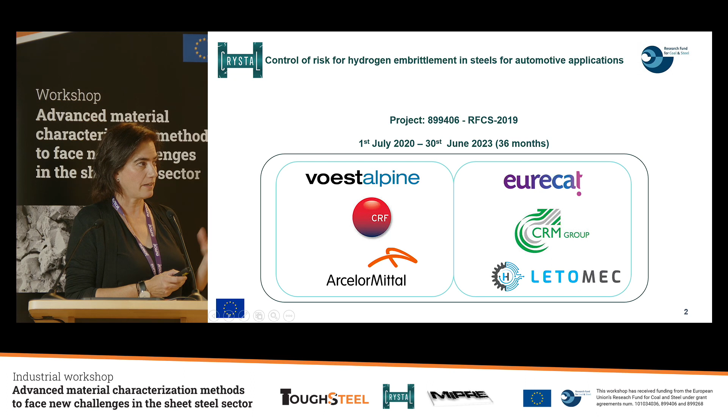The consortium is composed of 6 different partners. 3 of them are industrial partners: 2 steel makers, voestalpine and ArcelorMittal, and 1 car part manufacturer, CRF. And 3 research entities: CRM, Letomec, a spin-off of the Pisa University, and Eurecat. In this project, Eurecat is the coordinator.

An interesting news was published at the beginning of this month in a business and financial magazine called Market Watch. This article says that the advanced high-strength steels in automotive market is projected to experience growth in the forecast period of 2023 to 2030, as shown by new trends analysis and competition tracking, with a compound annual growth rate of 13.6%. Why is it important to use advanced high-strength steels?

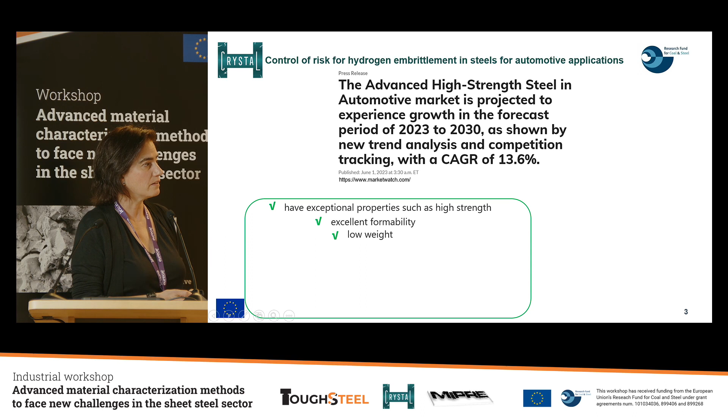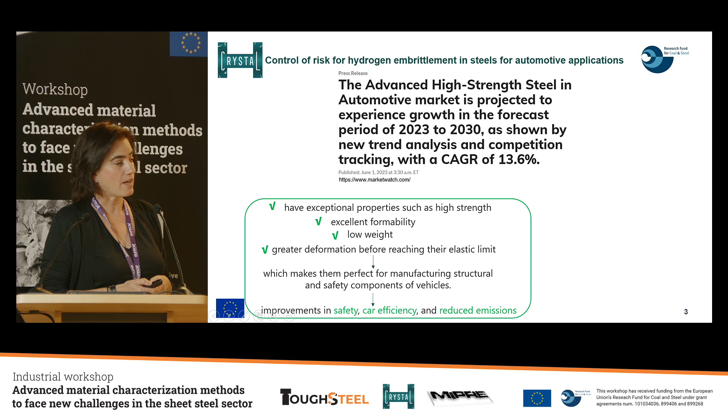Because we all know they have exceptional properties such as high strength, excellent formability, low weight, greater deformation before reaching the elastic limit. All these properties make them perfect for manufacturing structural and safety components of vehicles, improving safety, car efficiency, and reducing emissions.

But they are not all advantages. They show some challenges for manufacturing them, for example tool wear or spring back. They show crack sensitivity, especially at the edges, and show hydrogen embrittlement susceptibility. So the Crystal project is focused on the study of hydrogen embrittlement of advanced high-strength steels for automotive applications.

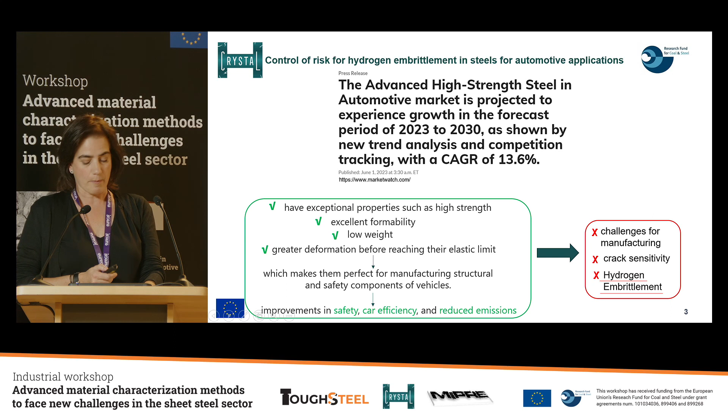Here are the main objectives of this Crystal project. We have 6 different objectives. First, validate the hydrogen embrittlement risk in advanced high-strength steel parts for the automotive industry.

Study the effect of hydrogen content on advanced high-strength steels in 2 types of these steels: cold-rolled steels and press hardening steels. Determine the hydrogen threshold content that drastically reduces the mechanical properties.

Use a novel non-destructive methodology, in this case a solid-state gas sensor, to quantitatively measure in situ the hydrogen absorbed during real production of steel parts.

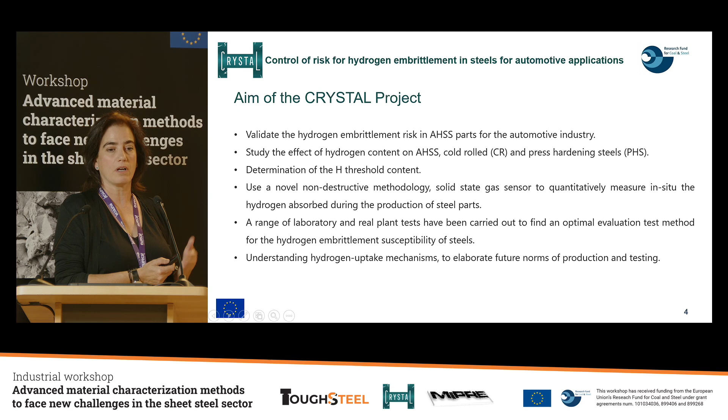The 5th objective is to perform a range of laboratory tests and also real plant tests to optimize or find which is the best method to determine the hydrogen embrittlement susceptibility of this type of steel. Finally, the last objective is to increase the knowledge or understanding of the hydrogen embrittlement uptake mechanisms to elaborate future norms for production and testing.

Atomic hydrogen absorption in automotive components can take place at different stages of car part manufacturing and also in service life. For example, in car part manufacturing, the most critical points are during steel production, during forming - it means cutting, joining, forming also - and then in pre-treatment, which includes e-coating, etching, and all these steps.

The hydrogen that can be absorbed during car part manufacturing is called internal hydrogen. Then the hydrogen that is generated during the oxidation and corrosion reactions during service life, and can be absorbed in the microstructure, is called external hydrogen.

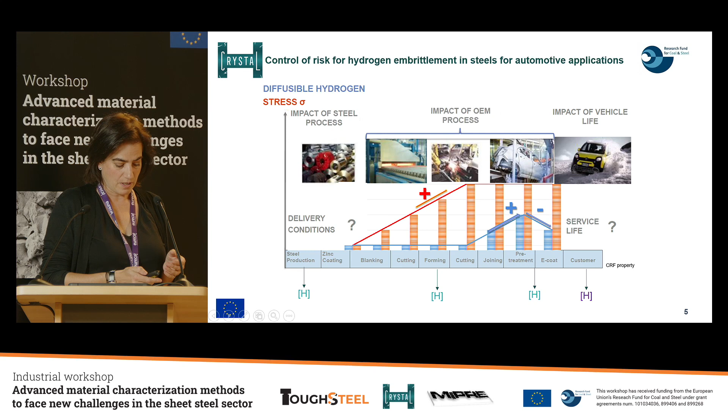So we think it's very important to know the effect of the internal hydrogen and the external hydrogen on the mechanical properties of these advanced high-strength steels. So the Crystal project focuses on these 2 types of hydrogen: internal and external hydrogen.

Here is the general project overview of the Crystal project. Later on, we will discuss in more detail each of the work packages. The work package leader is detailed in each yellow star. So we have 7 work packages. The first one is the coordination.

Then we have work package 2, where we selected the advanced high-strength steels that we wanted to study in the Crystal project; the leader is ArcelorMittal. In work package 3, we optimized the charging methodology to charge these cold roll steels and press hardened steels; the leader was CRM. In work package 4, we performed all the laboratory tests to study the internal and external hydrogen effect; Eurecat was the leader.

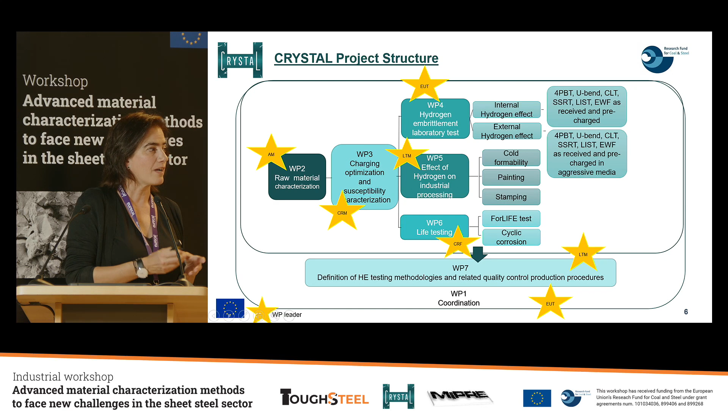In work package 5, we studied the effect of hydrogen in a real industrial plant; Letomec was the leader. In work package 6, the leader was CRF, studying life testing and performing different corrosion tests. Finally, all the results are summarized in work package 7, where we have to define the best methodology and the best test to identify and quantify the susceptibility of hydrogen embrittlement of these advanced high-strength steels.

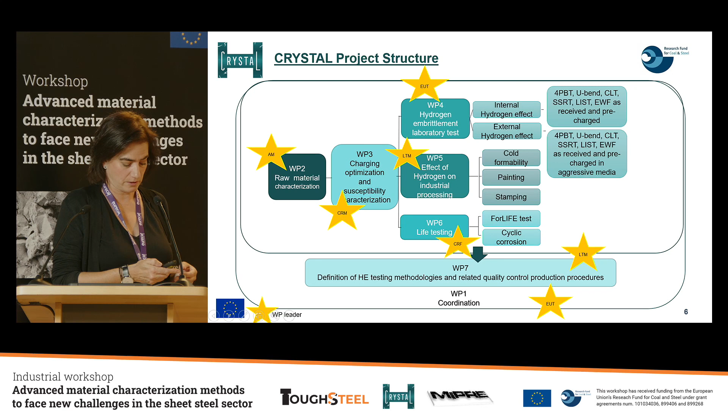So if we move in more detail to all the work packages, we start with work package 2. We selected 4 steels: 2 cold-rolled steels, CP1200 electrogalvanized from voestalpine and MS1500 also electrogalvanized from ArcelorMittal, and the press-hardened steels were PHS1500 galvanized from voestalpine and Usibor 2000 with aluminum silicon coating from ArcelorMittal.

We performed the same general characterization in terms of mechanical properties, also evaluating the microstructure, and we determined the hydrogen content in this steel process. We used 2 different techniques, LECO DH603 from voestalpine and a TDA equipment from ArcelorMittal. The hydrogen content measured was from 0.07 to 0.11, so the hydrogen pickup during the steelmaking process is very low.

Doing this hydrogen content characterization, we realized that inside the consortium we have 5 different laboratories with facilities to measure the hydrogen content. So we thought it was very important to define if the hydrogen content measured in all the labs were more or less similar, or which was the scatter that we have in this value.

In the table on the right, you can see all the techniques or the methodology that we have in our consortium. We can see that we have hot extraction, we have micro GC, hot extraction with different gases. Also, we have different heating rates, different maximum temperature, and different holding time.

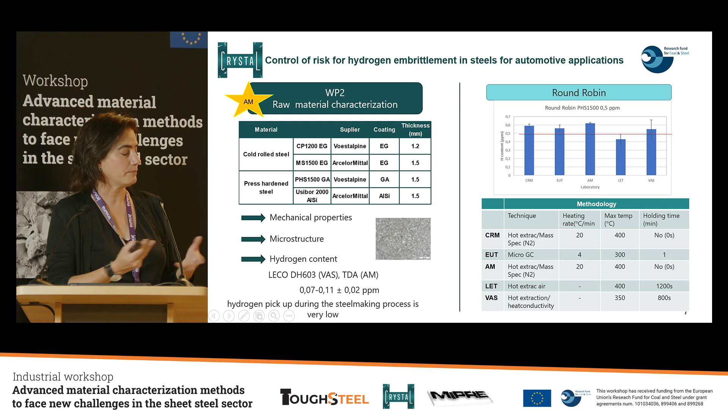So here is work package 3, where we optimize the charging methodology for these 2 types of steels. In the case of cold roll steels, we electrocharge using a mixture of sodium chloride and ammonium thiocyanate. We have to remove the zinc coat again, then hydrogen charge, and then apply a zinc coat again to keep the hydrogen in the steel, in the microstructure.

So we have to optimize these 3 methodologies: how to remove the zinc, how to charge the samples or the cold roll steels, and then to zinc coat again to obtain a tiny and dense zinc coating.

And in the case of the PHS steels, we hot charge this type of steel, modifying the dew point, the atmosphere, the holding time, and the temperature. Later on, Mélodie Mandy will explain how the optimization of these charging methodologies works.

Our hydrogen content target was between 0.5 to 1 ppm. We know that this value is far from reality, but we had to fix at least 2 hydrogen contents to perform the test in work package 4. In this work package, we also characterize in terms of diffusivity, electrochemical permeation, and solubility.

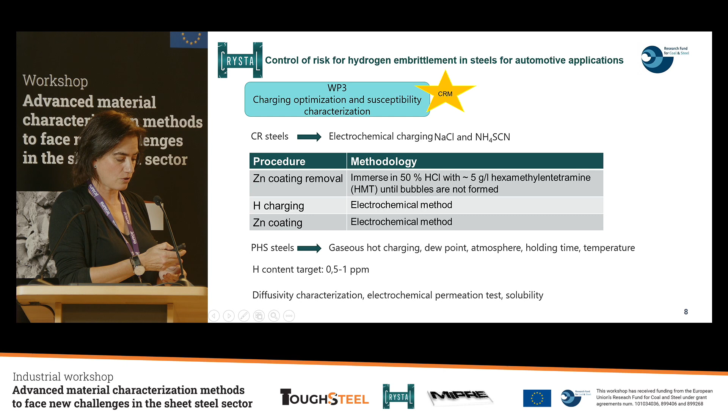Here is work package 4, where we perform all the laboratory tests. As I said before, we divided this work package into big tasks to measure the internal hydrogen effect and the external hydrogen effect. We had several meetings at the beginning of the project to decide which was the best sample geometry to perform all the tests.

In this case, we selected a plain sample to perform the U-bend and the 4-point bending test, and a SEP1970 for all the tests, except the cracking resistance.

We also had several meetings to define how the samples had to be prepared. In the case of the PHS steels, the PHS manufacturers send the blanks before charging, so they send to CRM the blanks, CRM charged the samples and then sent to the partners. Each partner was responsible for laser cutting the edges and laser cutting the holes in this case.

We have to include also that for the PHS steel 1500, we had to remove the zinc, charge the samples, and apply the zinc again.

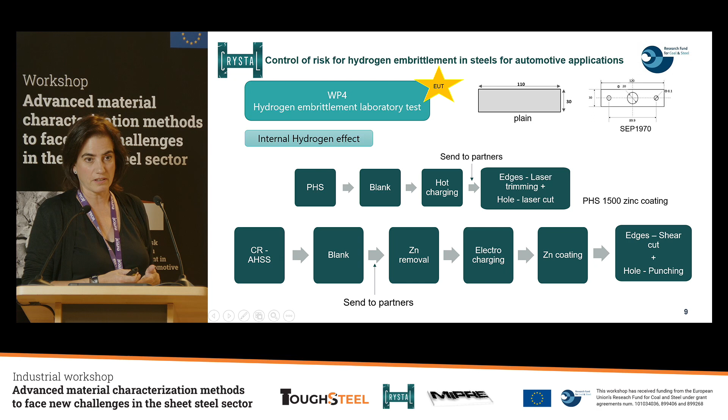And in the case of cold rolled steels, the steel manufacturers sent the blank to all the partners, and each partner was responsible for charging the samples. So as I said before, removing the zinc firstly, then electrocharging, applying the zinc coating again, and then we agreed to shear cut the edges and punch the hole.

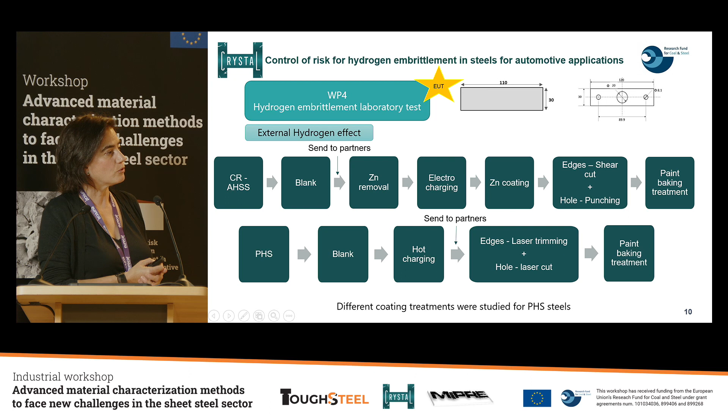In the case of external hydrogen, the samples were the same and the sample preparations were also the same, but we added a last step, which is paint baking treatment to be closer to reality. Also, we have to say that in the case of the PHS steel, we realized that it was very difficult to introduce hydrogen to the materials, so we decided to study how was the effect of hydrogen if we have different coating treatments, in the case of Usibor and PHS steel.

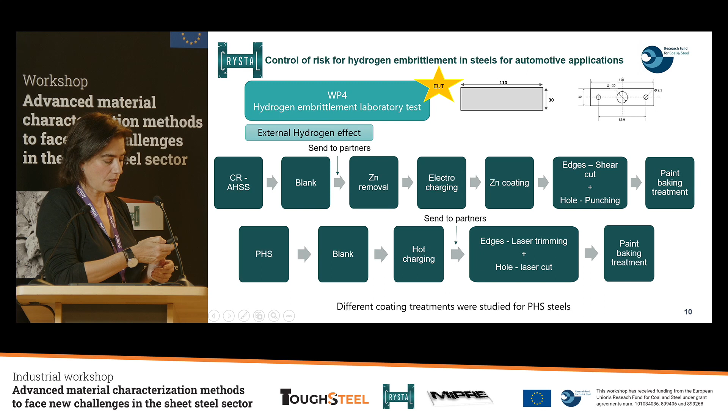So here are all the tests that we perform in this work package. In the case of studying internal hydrogen, we perform 4-point bending test, U-bend, constant load test, slow strain rate test, and cracking resistance in the as-received condition and after pre-charging. In the case of external hydrogen, we perform 4-point bending test, U-bend, constant load test, a slow strain rate test,

step load test, also in as-received condition, after pre-charging, and in aggressive media. We decided to test these samples in immersion and in salt spray test. Anis Aouafi, later on, will explain the most important results of this work package, of this test. And on the right side, you can see some images of the test.

So on the top right, you have the cracking resistant tool that Laura mentioned sometimes today. On the top left, we have a 4-point bending device. On the bottom right, a 4-point bending test in immersion. And on the bottom left, a slow strain rate test.

Also, I would like to add that in all the cases, we measured the hydrogen content before the test and after the test. Because in some cases, for example, in the constant load test, the duration of the test is quite long, so we wanted to be sure that we don't have hydrogen uptake during the test, I mean, the gaseous hydrogen during the test.

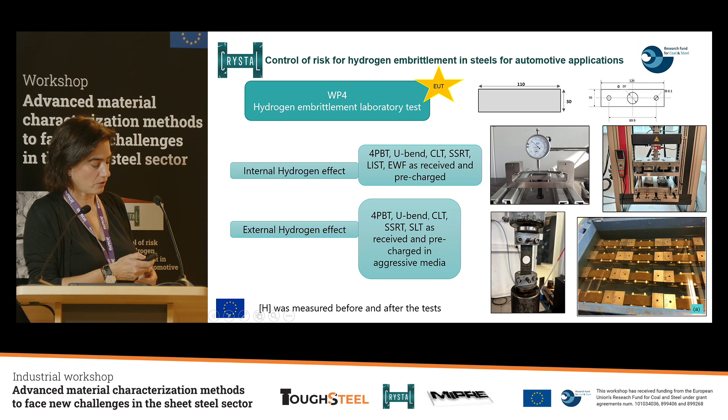So in work package 5, we study the effect of hydrogen, but in real industrial processing. We evaluate the cold formability, performing the hole expansion test at different hydrogen content. Also, we evaluate the effect of painting in different conditions, and we perform a 4-point bending test of different types of painted samples, on basic E-coated samples, E-coated plus stone chipping samples, and E-coated plus scratch samples with

2 different stresses. These samples, we evaluate the hydrogen susceptibility, introducing them in immersion and also in salt spray test. And finally, Letomec measured the hydrogen content in different stamping conditions. At the end of this session, Linda Bacchi will show you some results of this hydrogen measurement in

modifying the stamping conditions. And in work package 6, we performed the life testing. Here it was planned to do the ForLIFE tests, but due to economical reasons, CRF couldn't perform it. And we decided to increase the number of the samples tested in cyclic corrosion and increasing the number of inspections.

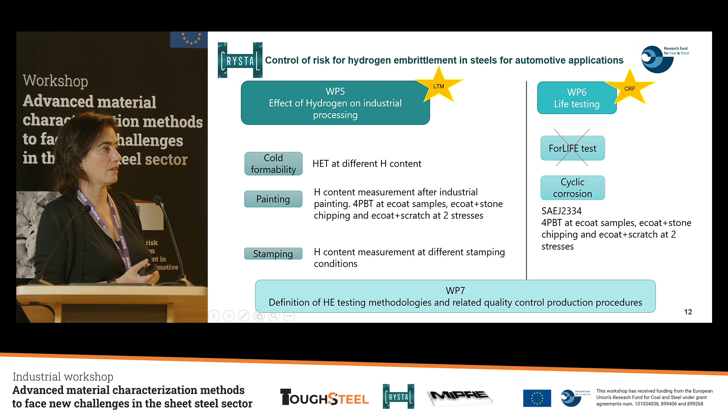So the selected cyclic corrosion test was SAE J2334, and we tested the same samples as in the painting in work package 5. So the samples E-coated plus stone chipping, and E-coated with scratch with different 2 stresses.

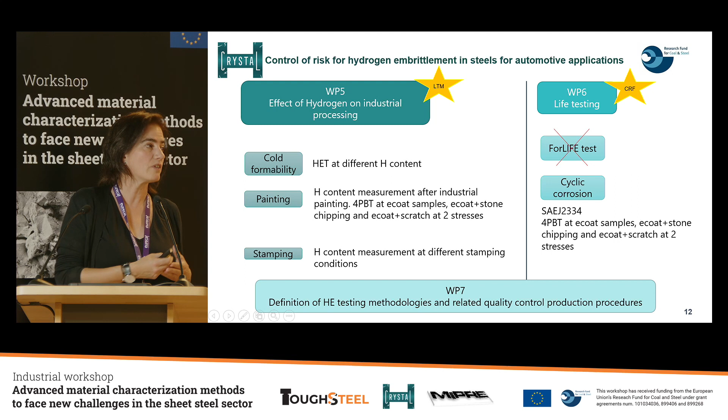And in work package 7, we are analyzing all these results, and these days we are writing a guideline for the car part manufacturer and also for the steel manufacturer, to select which is the best methodology to charge the samples and the best methodology to test the hydrogen embrittlement of these types of advanced high-strength steels.

So as Sílvia told, I come from CRM Group. Firstly, just two words about CRM. CRM stands for Center of Research in Metallurgy. We are a research center located in Belgium, founded 75 years ago. We are among 270 researchers dealing with different aspects of metallurgy. Our global approach is really dedicated to considering the product, the process, and the application. We generally work from the lab scale until the different pilot lines that we have for industrialization. We work for a certain number of members that are usual clients and also for other private clients.

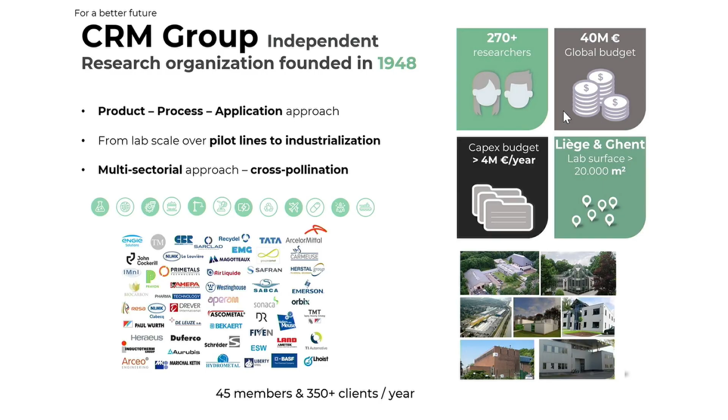Our activities are focused around 6 different axes. The first one is really our core business and is dedicated to process, product, and application development. We also work on the energy shift, on advanced manufacturing, industry 4.0 and digitalization, as well as the circular economy and construction.

So this presentation, as Sílvia introduced it, will be focused on the third work package of the Crystal project. The main objective of this work package was to optimize the charging condition of hydrogen in the 4 different materials that we have tested in the Crystal project. The partners involved were Letomec, ArcelorMittal and the CRM Group.

For Letomec and ArcelorMittal, you will see also Linda and Anis just after this presentation. Globally, the objective of this work package was firstly to optimize the hydrogen charging protocol. As Sílvia told it, it was different for cold rolled steel than for press hardened steels. We also studied the effect of different parameters of this hydrogen charging on the diffusible hydrogen content. Afterwards, the other objective was to characterize the global system in terms of hydrogen behavior in those different metals, so hydrogen traps on one side and hydrogen solubility and permeability on the other side. I will come back on those different aspects.

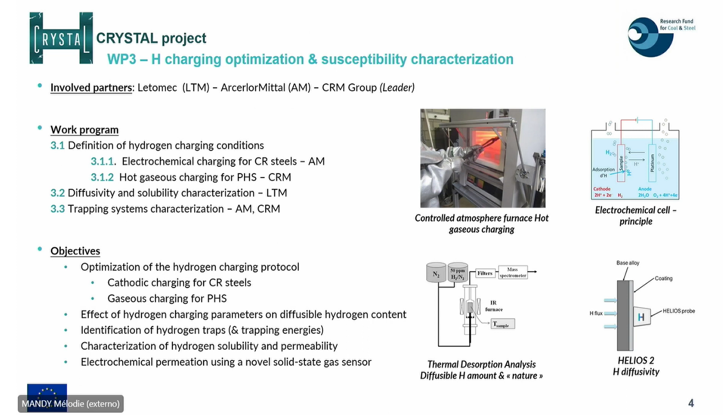So let's begin with the hydrogen charging of the cold rolled steels. Here we come back to the slide showing the general strategy that Sílvia has shown you very briefly during her presentation.

In this case, for the cold rolled steel, we have performed electrochemical charging. This was decided to be representative of what is done or what can appear in the industrial reality. In the case of cold rolled steels, when we received them, we were first forced to remove the zinc coating, as those materials were electrogalvanized, and then perform the electrochemical charging. This was performed mainly at ArcelorMittal for 2 different grades, the MS1500 and the CP1200. For the zinc removal, it was a quite basic method with pickling in HCl and HMTA solution, and after that the electrochemical charging was performed.

So basically, electrochemical charging consists in putting your sample that you want to charge in hydrogen as a cathode in an electrochemical cell, and you will generate hydrogen at its surface. Part of it will recombine into H2 molecules and degas, and part of the hydrogen will enter the material. In this case, we have worked with water and a sodium chloride solution in which we have added various amounts of ammonium thiocyanate, which is actually a recombination poison. This means that this molecule will inhibit the recombination of hydrogen atoms into H2 molecules, and so limit the degassing into gas molecules and favor the entrance of hydrogen in the material.

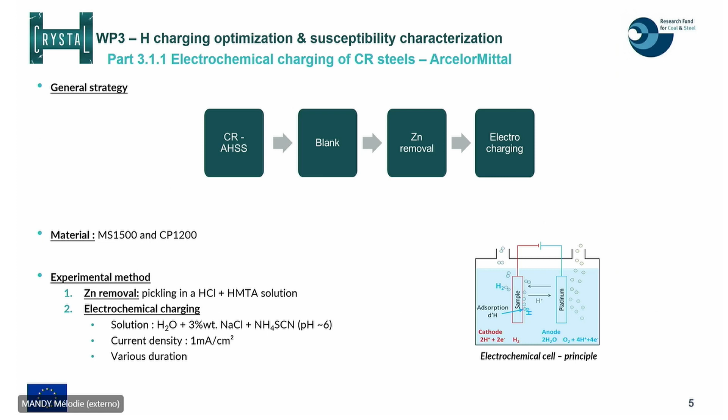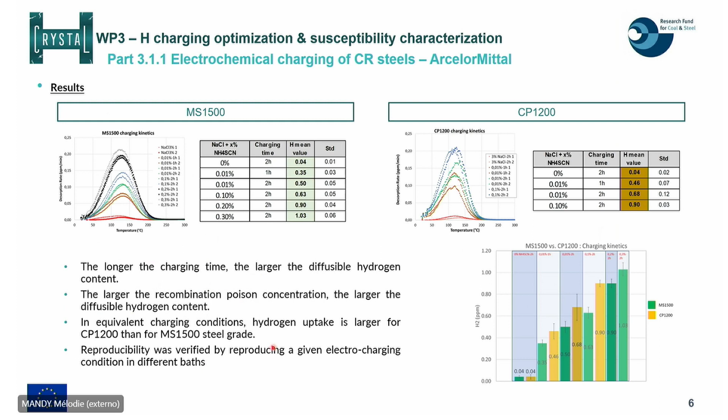When we compare both steels, you have the graph on the right side here, where you can see that in equivalent conditions, the hydrogen uptake will always be a bit larger for the CP1200 than for the MS1500. Finally, ArcelorMittal verified also the reproducibility of those electrochemical charging by reproducing the different treatment in different baths several times. So that was for the part about the electrochemical charging.

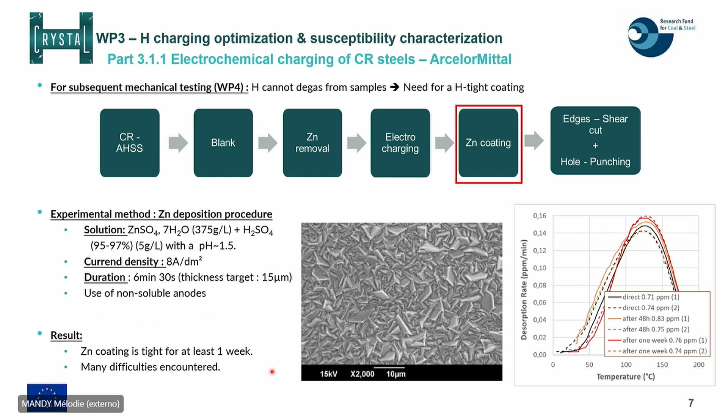So now for the press hardened steel, we are on the other topic. For that part, the strategy followed was to charge them with what we call hot charging, so it's actually a gaseous charging in a furnace. This was performed for both press hardened steels, Usibor 2000 and PHS 1500.

It has to be mentioned that Usibor 2000 is a material coated with an aluminum and silicon coating, while PHS 1500 was actually with a zinc coating. It was actually a GA, so a galvannealed coating.

For the gaseous charging, we performed with steel sheets, already steel sheets, so 160 millimeters by 200 millimeters. The gaseous charging consisted actually of an austenitization heat treatment performed in a controlled atmosphere furnace.

According to specific conditions that we chose in order to fit with the process windows of both steels, you see finally the conditions chosen here in the table. On the right side, globally the austenitization temperature was 900 degrees, or just below or just above.

We have defined several holding times as soon as we reached a temperature of 870 degrees Celsius, and we tested also two other parameters of the atmosphere.

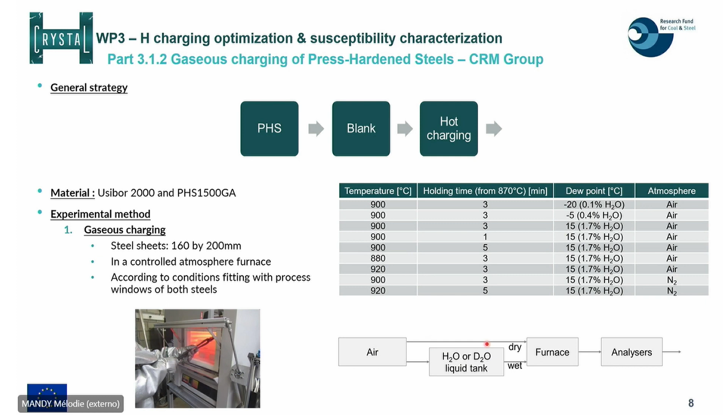After gaseous charging, we perform the thermal desorption analysis. So what does thermal desorption analysis consist of? We put the sample in a furnace.

We heat the sample at a given rate, here 20 degrees Celsius per minute until a temperature of 400 degrees. By doing this, we let the hydrogen that was absorbed in the material desorb, and it is carried away by nitrogen, which is inert here, as carrier gas, until the mass spectrometer to be quantified. Here you see just a small picture of the equipment.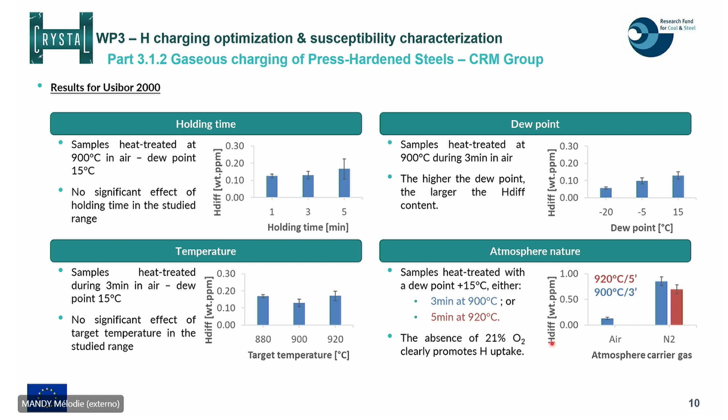So that was for Usibor 2000. The same work was performed for PHS 1500. It was a bit different in this case because we encountered many difficulties charging these materials with the zinc coating. So for the sake of this project, we were forced to charge this material by removing firstly its coating. So the result you see here is not about PHS 1500 GA, but bare PHS 1500.

What we have seen just before for Usibor 2000, the conclusions are quite the same for these bare materials. We have a strong impact of the atmosphere - in nitrogen atmosphere, we have a larger uptake than in air. We also have this effect of the dew point, which is well marked. The effect of the holding time and temperature are maybe a bit less marked, a bit less significant than for Usibor 2000, but remains less important than the atmosphere effect.

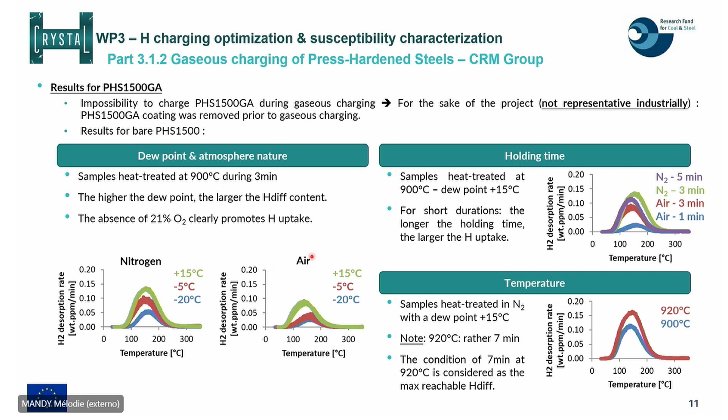So that was for the hydrogen charging. Now in terms of characterization of the system, at Letomec they were able to characterize the diffusivity and solubility of the four materials we worked with in the crystal project, owing to a specific tool that they developed, called the Helios 2 probe. It's based on the principle of an electrochemical permeation cell, but with a solid state sensor.

The different conditions used are given here. I will not enter into the details, but the principle is highlighted here: you put hydrogen on one side of the material, you detect which amount and in which time it will arrive to the other side, and you have a graph like this one with the hydrogen flux as a function of time. The diffusion coefficient, D in the equation, is defined based on a method they chose from the literature, as a function of the time required to reach a certain level of the regime flux of hydrogen diffusion through the steel.

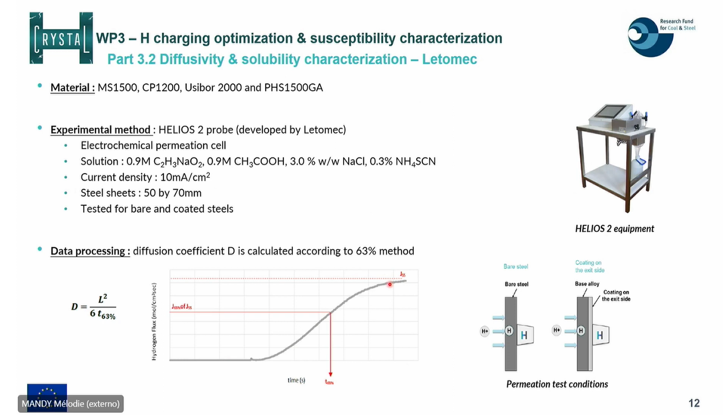Some words about the results - typically results you can obtain here, for instance, for the MS1500. They performed these tests on the bare steel and also on the zinc-coated material, or the AlSi-coated material for the Usibor 2000. In each case, the coating was only on one side of the material, just to see its effect. And you see a bit the typical experimental curve that you can obtain.

In terms of results, what we see mainly is the diffusion coefficient of hydrogen, summarized here in the table. You see that mainly what we could expect is the fact that the presence of the coating generally hinders hydrogen diffusion, so diffusion coefficients are smaller. Diffusivity in bare cold-rolled steel is quite similar in both of them. And for the PHS steels, Usibor 2000 apparently shows a slightly slower hydrogen diffusivity than PHS 1500.

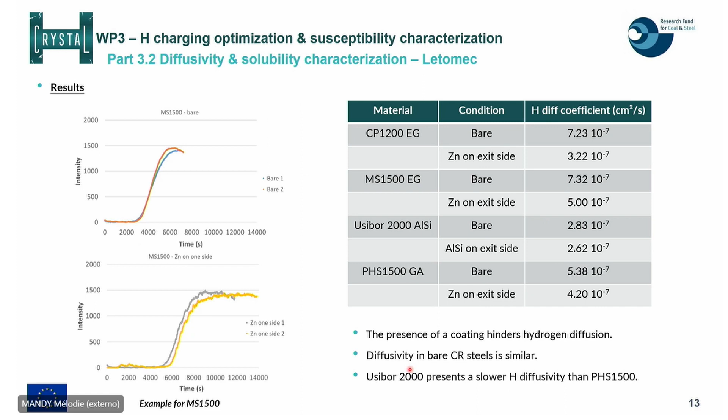So this leads me to the final part of this presentation. A last thing we had to do in this part was to characterize those materials in terms of hydrogen traps. What was performed here is globally the same methodology as just before - firstly, we charged the samples with hydrogen, using electrochemical charging for cold-rolled steels and gaseous charging for PHS.

The specificity here is the fact that we used deuterium for this study at ArcelorMittal and at CRM. Deuterium is the hydrogen isotope with one more neutron. It's very interesting because it's far more scarce than hydrogen, so we are sure we can perfectly identify it when we find it in the results. This was also performed on bare steels in both cases, not only for PHS 1500, because the presence of a coating would induce a diffusion step that would be slower and would impact the results. After that, we performed thermal desorption analysis with various heating rates, and we applied the Kissinger methodology.

So basically, the idea is that when you have a graph like this for one given material with different heating rates, you have a peak temperature which is different at each heating rate. You use this temperature in this equation, and you find the activation energy that we found here for the material. As you can see, we have activation energies for detrapping of hydrogen which are quite close, and we are convinced that it corresponds to reversible traps that are likely dislocations for those materials.

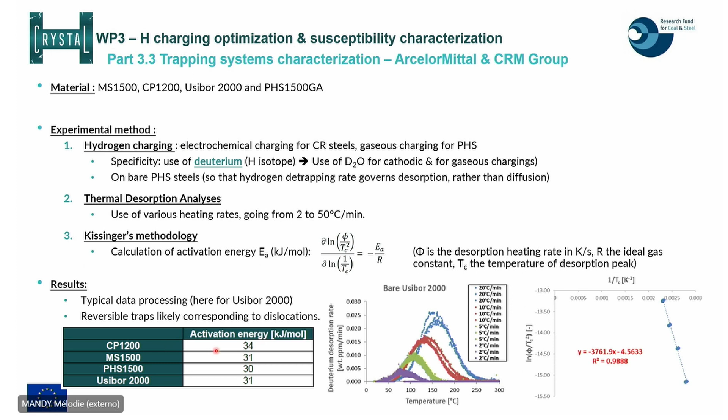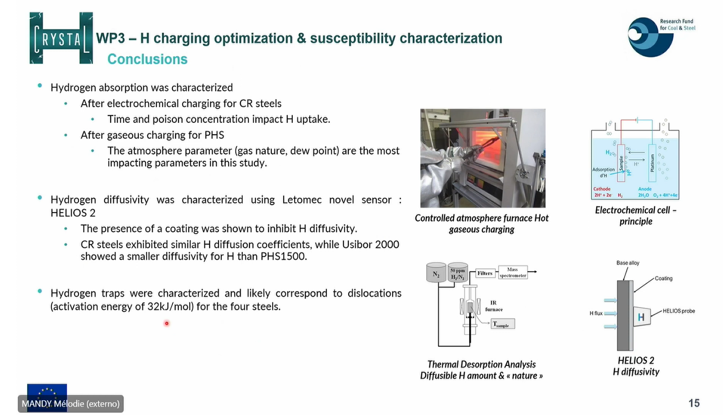For the conclusion, we have charged hydrogen in the 4 different materials with more or less difficulty depending on the material. We see some impact of specific parameters, like the time and the poison concentration for the cold-rolled steels, and like the atmosphere for the press-hardened steels. We were also able to test diffusivity and permeability of hydrogen through those materials with and without the coating, through the Letomec sensor Helios 2, and we were able to characterize the different traps present in the material as dislocations. Thank you very much for your attention.

Hello everybody. Today I'm in charge of presenting the results that have been obtained for mechanical characterization of hydrogen embrittlement during this project. Let me first give a brief summary of all the tests that have been tested.

I think Sílvia mentioned them in the introduction. The two first tests have bending solicitation, the famous well-known 4-point bending test. I will go into detail for this test later.

The U-bend test, which is used to simulate the forming process. As you can see here, I take my pointer. As you can see here, we simulate the bend, and then we use the screw in order to keep the sample under deformation.

The other tests used are the constant load tests, and the principle of this test is to impose a constant displacement using this kind of device, called the proof ring device, which acts as a spring to maintain the sample under constant displacement.

The two other tests are the slow strain rate test, or the linearly increasing stress test, which uses a tensile machine to apply a constant increase of loading at various strain rates.

The other test that has been used is the incremental step load test, and for this one we also use the tensile machine in order to apply an incremental step loading during the test.

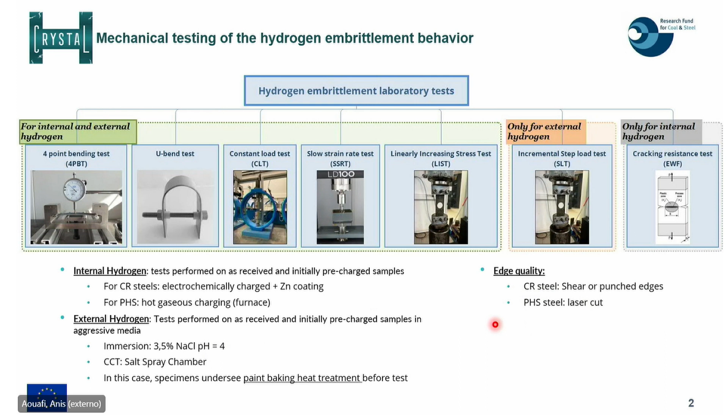Let me begin with how we characterize the internal hydrogen using the 4-point bending test. The principle is to impose a constant displacement using a screw, and we measure the displacement using this comparator. This displacement is correlated, in the elastic domain, to the applied stress using the setup geometrical parameters and material properties like thickness.

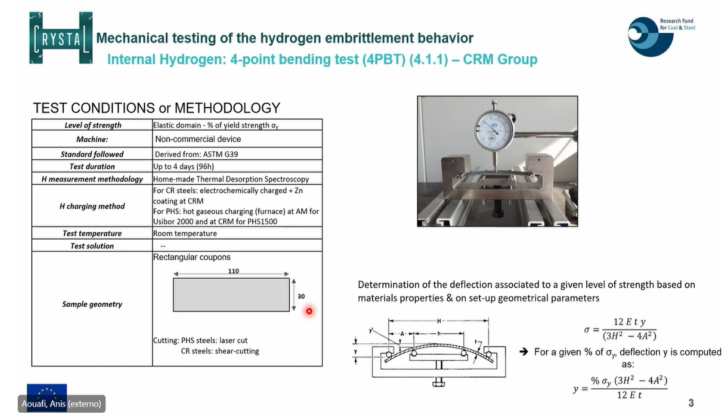This test has been applied during 4 days on press hardening steel and cold rolled steel with different internal hydrogen content. The results are summed up in this slide.

For press hardening steel, where the specimens are laser cut, we could obtain for all materials a delayed fracture map with applied stress versus diffusible hydrogen, and when the crack occurs, it's highlighted by a red point. With this graph, we highlight the delayed fracture map that we could obtain using this test under these conditions.

On the right is highlighted the obtained delayed fracture map for MS 1500, and in this case the edge was sheared. So we could not compare the behavior of MS 1500 regarding PHS 1500, because different types of cutting have been used for both materials.

Another remark, as mentioned by Mélodie before, we were not able to have enough hydrogen charging on the CP1200. We are still working on it. We were surprised by that, and we were not able to obtain an equivalent delayed fracture map compared to the other materials.

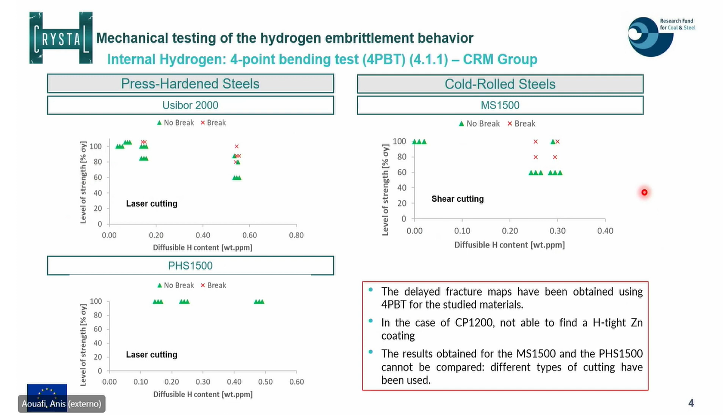The second result I want to show you, we have chosen to present today, makes the bridge with what was presented this morning, applying the essential work of fracture methodology to the hydrogen embrittlement topic. The principle of the test - I think the details were mentioned this morning.

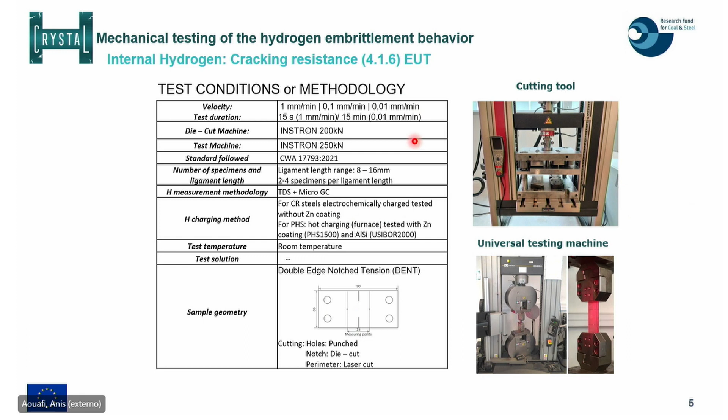The specimen is a double notch specimen, and it has been used on specimens that have been electrochemically charged for cold rolled steel, or hot charged for press hardened steel, with different strain rates or velocities used for this test.

So the results that have been obtained - here I will focus only on the case of CP1200. The principle of the test was detailed this morning. What's shown here on the left, on top, is the total work of fracture that was obtained with different hydrogen contents.

As you can see here, for different ligaments, we can highlight that using this kind of test, the essential work of fracture, we can discriminate the effect of hydrogen and the effect of different hydrogen content using the parameter of total work of fracture.

We have the same conclusion regarding the essential work of fracture, and as you can see, the essential work of fracture drops when the hydrogen content increases in the specimen.

So here I show you the good results that have been obtained using this kind of methodology for CP1200. Unfortunately, for MS1500 and Usibor 2000 it was not really easy to obtain.

This is the limitation of this kind of methodology, because for higher grades like martensitic and Usibor or press hardening steel, we are not able to differentiate the different hydrogen contents. Further work needs to be done to adapt this methodology for higher grades, and maybe some alternative parameter could be used to discriminate the effect of different hydrogen content on the response of this test.

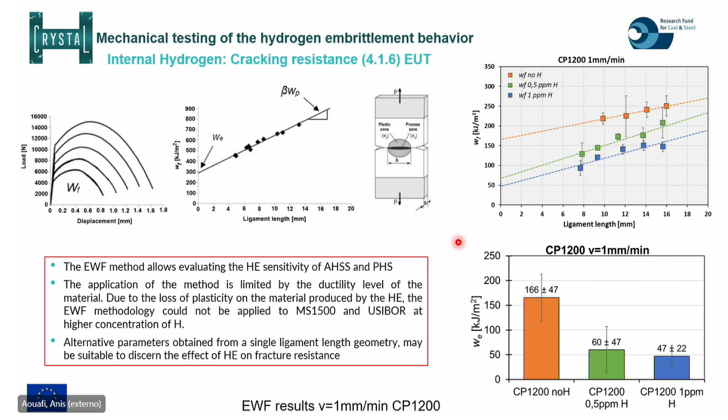The third and last result I want to share is the result obtained when characterizing the external hydrogen effect. The hydrogen comes from corrosion during the cycle life of the vehicle, and we use the same test shared before for the 4-point bending test.

In two different media, as I said before in the introduction: immersion in salt water with pH 4, or application of cyclic corrosion test, or salt spray, the well-known salt spray test. Here are some photos to illustrate how the bending tests have been immersed in water or put in the cyclic corrosion chamber to achieve the desired cycle.

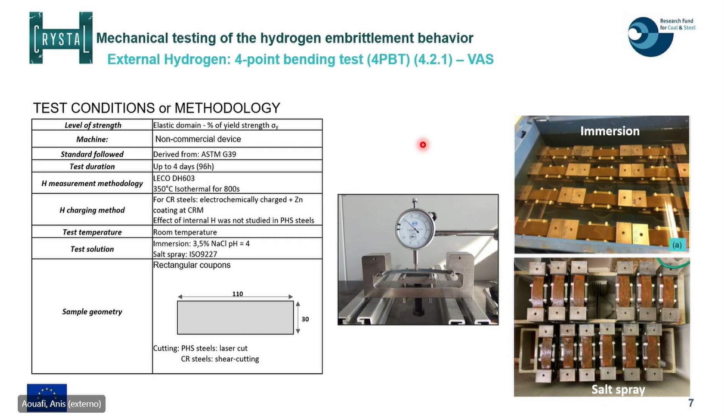So for press-hardening steel, laser cut was used, and for cold rolled steel, shearing cutting was used. The first result I want to share with you, obtained by voestalpine, concerns the press-hardening steel heat-treated.

I need to mention that all the tests when we are dealing with external hydrogen foresee paint baking in order to be representative of the real case on the cycle life of the part on the vehicle. So as mentioned by Sílvia in the introduction, different heat treatments have been used for these two grades, PHS1500 GA and the Usibor 2000 AS coating.

As you can see here, the result obtained in immersion in salt water or SST for different applied loads. We vary the load from 100% of yield strength down to 40% of yield strength, and both materials don't foresee any crack. No failure has been observed using this test in this condition, independently of the heat treatment.

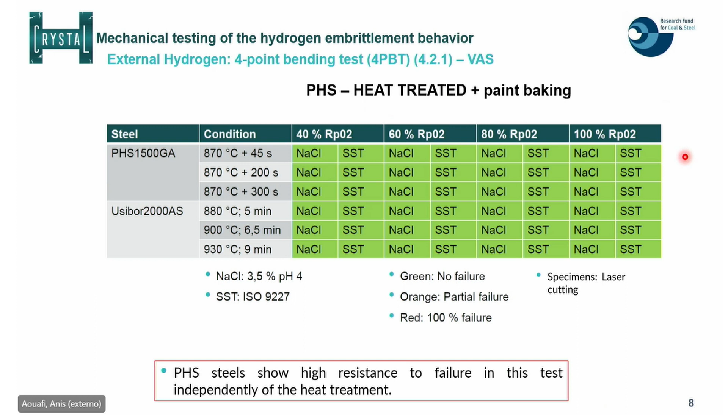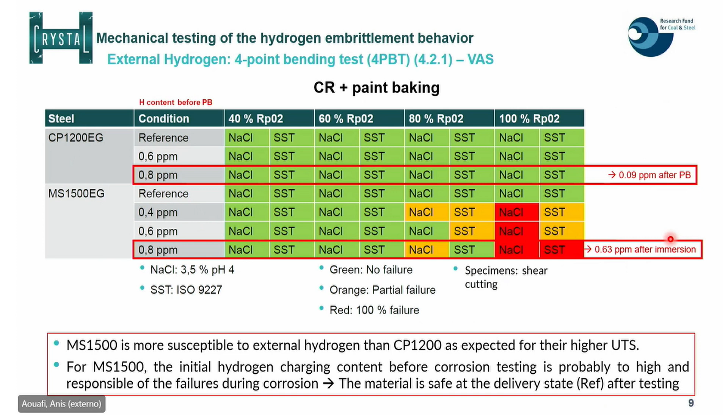So another work that has been performed in this working group, and we want to share with you this work. We have tried to classify the mechanical tests that have been used. The objective of this work is to give you an overview of a classification according to different criteria. These criteria have been grouped into families.

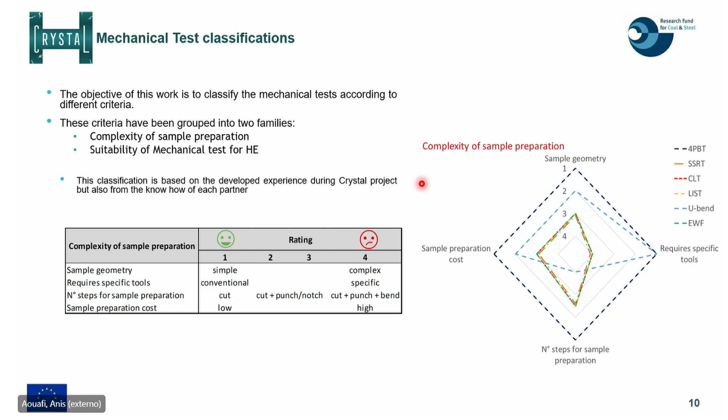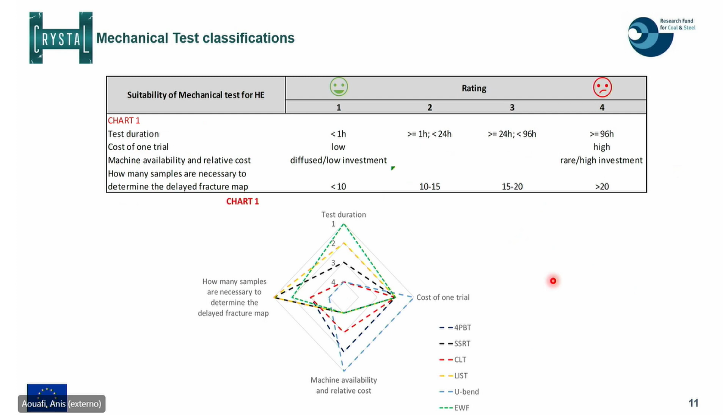Here we mentioned the ISO standard, the ASTM, the VDA, the work in the VDA groups, guidelines from certain OEMs. Ability to define standard deviation is important, and whether there's a lot of parameters or a small amount coming from the output of such a test. But we also need to take into account the complexity of data processing.

I think here we have tried to classify all the tests based on what we learned during this project, but also based on the know-how of each partner. I don't want to highlight one test compared to others. The idea is to give an objective classification. We do not recommend or promote a test at the moment, at least. Each interested person could choose, according to their technical and budgetary constraints, the appropriate test.

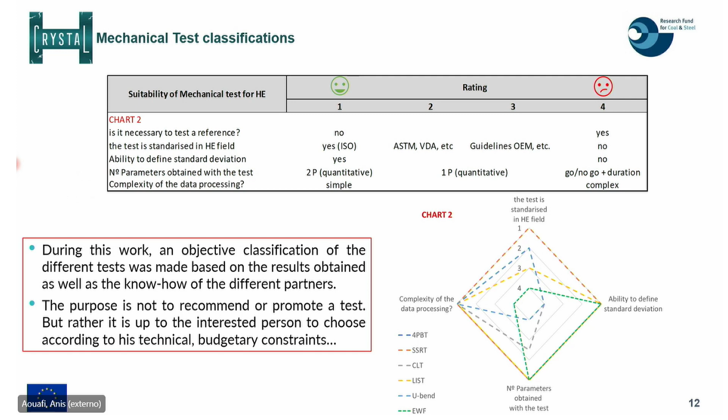So as part of the conclusion of this work, we have characterized 4 different grades with different tests, a large amount of tests. We have tried to characterize the hydrogen, the internal hydrogen found in the material, but also the external hydrogen which comes during corrosion of the material during its cycle life. We have also tried to highlight if there's any combination of both phenomena.

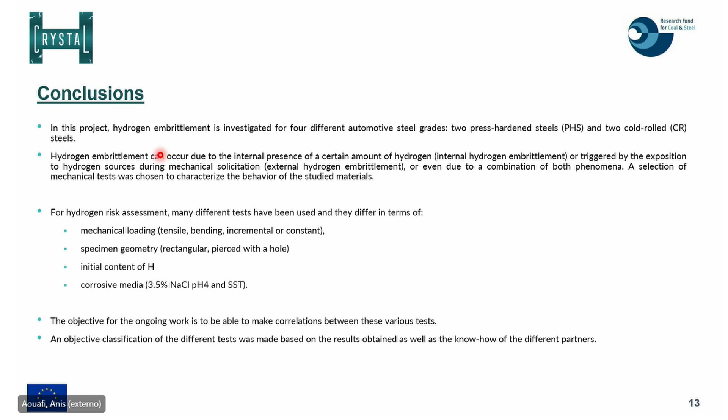So here I finish my presentation. Thank you all.

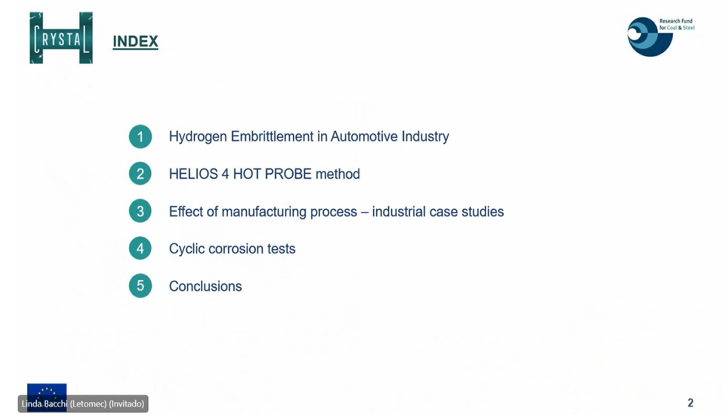Now we are going to focus on a series of diffusible hydrogen measurements that were performed online at industrial level with innovative technology. First, we'll have a brief introduction of what hydrogen embrittlement is in the automotive industry. Then we'll focus on the HELIOS technology and the methodology we adopted for testing. Then we'll move to the results of the Crystal project, and finally some conclusions.

All of you already know that environmental norms push for the reduction of emissions, so automotive industry has to reduce, among other things, vehicle weight. One way to do this is to use materials with improved performance. Advanced high-strength steel could be a nice choice here. The only thing we should also consider in vehicle design is hydrogen embrittlement, because higher material performance involves also the risk of hydrogen embrittlement.

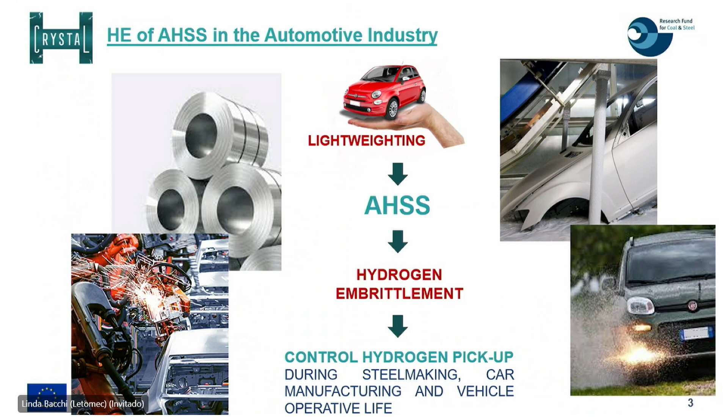As already said by Sílvia before, hydrogen can be absorbed in different steps of part production, from steel making to vehicle manufacturing, part manufacturing, up to the operative life of the vehicle, for example due to corrosive phenomena. What's important here is to understand the absorption of hydrogen inside the metal.

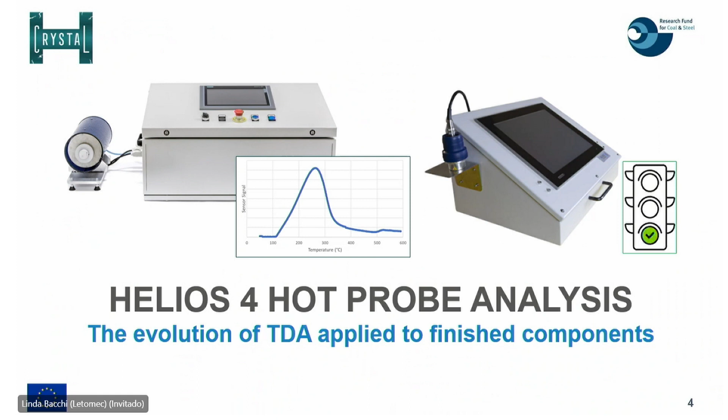This device is the HELIOS 4 hot probe, and how we think it should be used. It should be used for quality control, picking the device in the plant. The device is portable equipment and can be easily applied to the part or the coil directly to the finished part. There is no need to cut the sample, there is no need to remove the coating. You have a very easy instrument to perform

diffusible hydrogen measurement on bare and also coated components. The important thing to understand is that you have to use it as a sort of traffic light, because you will not have the same precision as a laboratory device, but you can understand if your process is going out of control. Every measurement can be compared to the behavior of the material for different diffusible hydrogen content and understand if you are going toward the critical value.

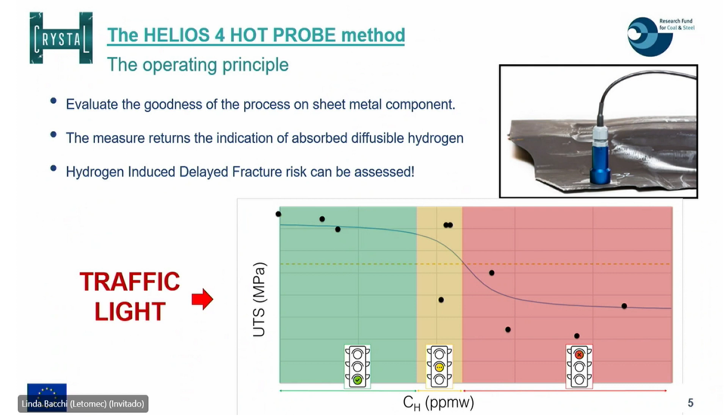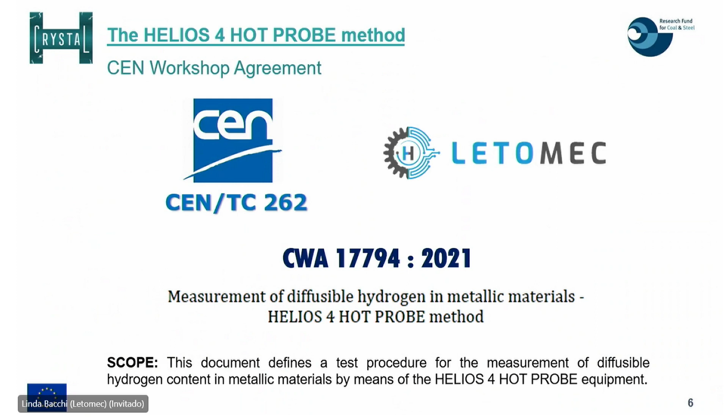Another important thing is that for this instrument, in the past, in the recent Horizon 2020 project Form Planet, we have also been able to realize and publish a CWA dedicated to this instrument, and in particular to the methodology that should be used to apply this device. You can read this CWA online, you can find it, and we realized this CWA together with the collaboration of the other partners of the project, and in particular with the Spanish Association for Standardization.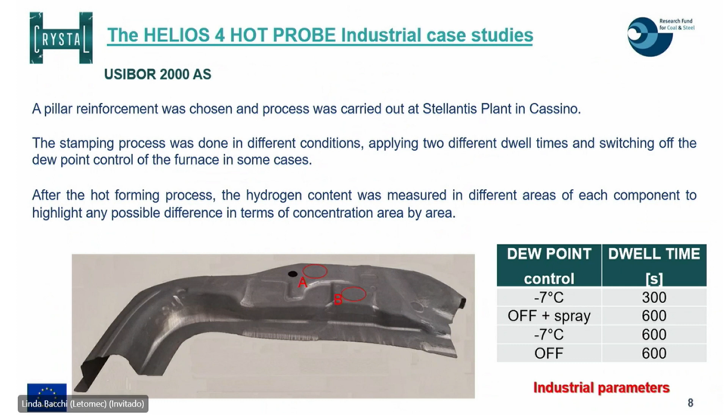After this hot stamping, we realized a series of diffusible hydrogen measurements by means of the HELIOS 4 hot probe. In this case, we found a couple of areas that were identified as A and B on the component. Here you find the statistical evaluation of what we found in this experimental campaign. We found very low hydrogen content in almost all the components, in both areas that were analyzed. The maximum value that we found was 0.2, and the average value was 0.1. However, if we compare it to the literature value, the critical threshold value for hydrogen embrittlement of this specific material that we found online, represented by the red line, all of the measurements that were performed were much lower.

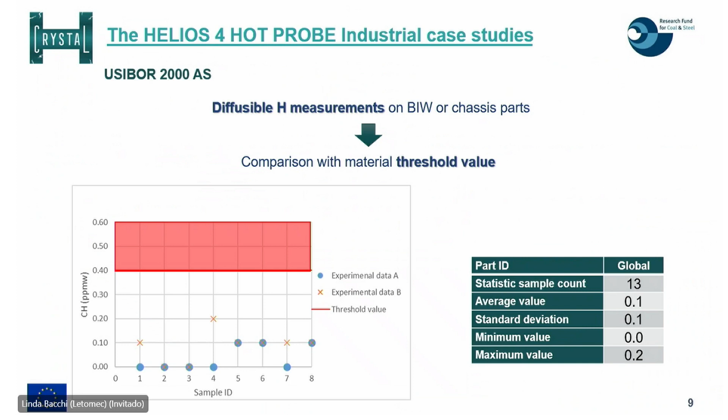The second case study was realized on the PHS 1500. In this case, this material was galvanized, and we defined a different component, which was the B-pillar. Here it's represented a part of the B-pillar, because we needed to ship these parts from the Voestalpine plant to our lab, since due to the COVID situation there was no way to reach the Voestalpine plant. So we received the component very fast, and we performed the measurement of diffusible hydrogen in the 4 areas that you see here highlighted in red squares.

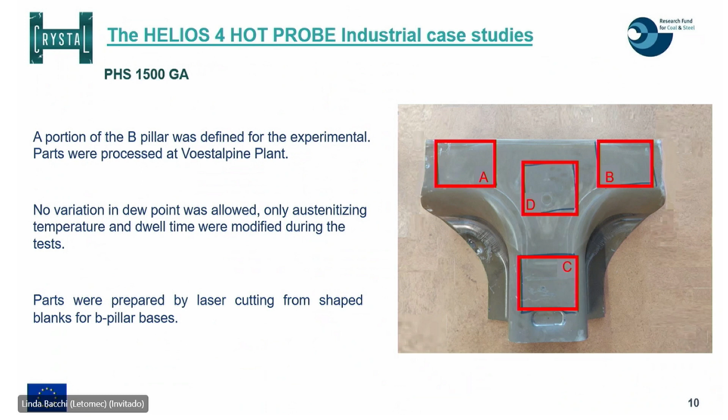In this case, at the Voestalpine plant, there was some difficulty in changing the parameters of the process, so we only had the possibility to change the austenitizing temperature and dwell time.

Also in this case, we have reported here the statistical analysis of the measurement. We made a lot of measurements on several pieces, and the maximum value that we found was 0.1, but however, the average value of all the measurements that we performed was 0.0. So I think we can say there was negligible diffusible hydrogen content in almost all the pieces that we received from Voestalpine.

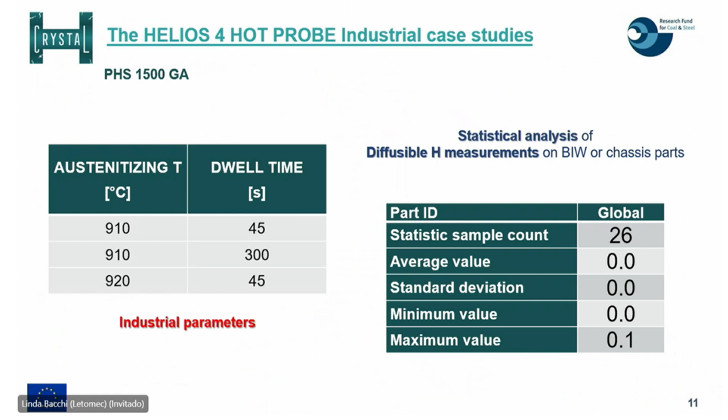And this is the conclusion related to the industrial measurement on components. Then, still within the frame of the Crystal project, we performed additional measurements. In this case, the measurements were performed after the cyclic corrosion test.

According to the standard, on this sample that we cut, we realized for the 4 materials under investigation, we decided to test 3 different conditions. The first one was without the cataphoretic coating. The second one was with the cataphoretic coating. And then we decided to add one more condition, which was application of the coating followed by simulation by stone chipping of a sort of damage on the surface.

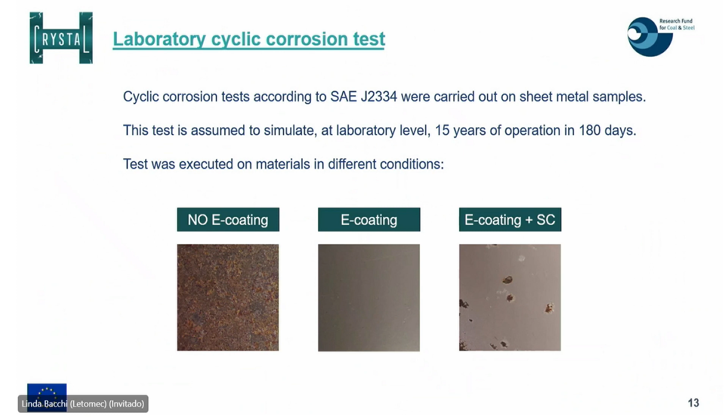Here, just as an example, because samples were very numerous, we reported for the PHS steel only some images from the testing. In particular, we selected the samples after e-coating and stone chipping. As you can see, over time it is very clear how we can appreciate the increasing of red rust. I can also tell you that we appreciated the metal dissolution of the material. However, in all cases, the diffusible hydrogen content inside the sheets was very low.

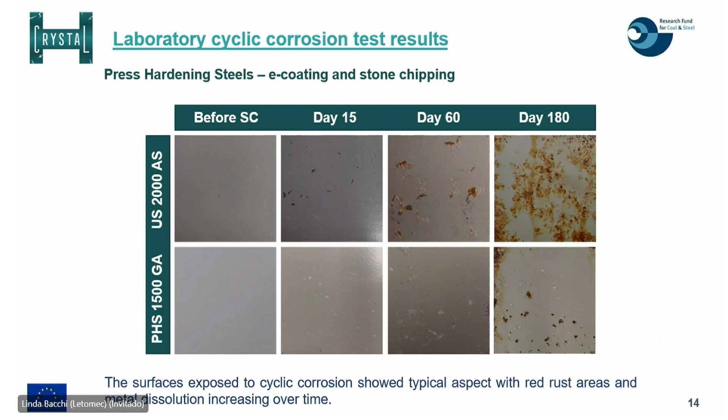We performed the same evaluation also for the cold rolled steels, and here there are some images of the samples, still considering the sheets with the e-coating and stone chipping. Unfortunately, we performed a lot of measurements, not only with the Helios 4 hot probe, but we decided to repeat some measurements also with the typical TDA analyzer, and we were not able to appreciate any trend in the hydrogen absorption.

What we discussed together with other partners of the project was that maybe we can have some very local hydrogen accumulation, and so all of the testing methodology that we can apply considers an average measurement of a certain area or a certain part of the sample, and so we were not able to assess the hydrogen embrittlement risk during this corrosion testing.

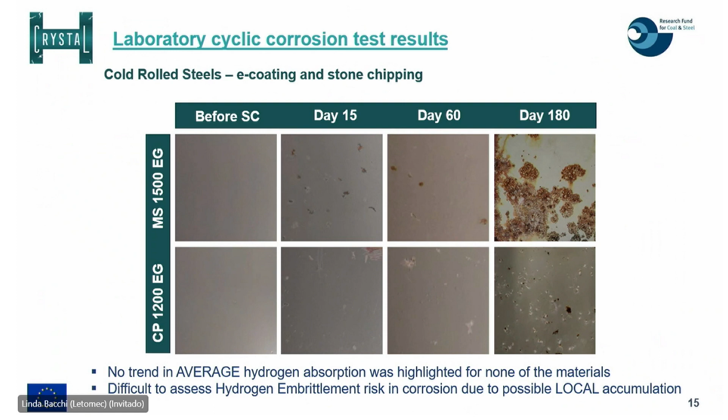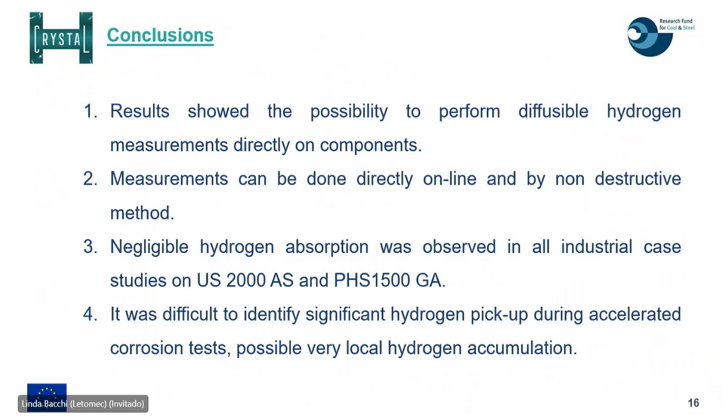I think we are at the conclusion. We were able to perform some diffusible hydrogen measurements by means of the Helios 4 hot probe. We were able to do this maybe also online, directly on components, and there was no need to remove the coating on the samples. During the industrial case studies, we observed negligible hydrogen absorption in both case studies on press-hardening steel, while concerning the cyclic corrosion test, it was difficult to identify significant or appreciable hydrogen absorption during this accelerated corrosion test, maybe due to very local hydrogen accumulation. So that's all from my side. Thank you very much for your attention.